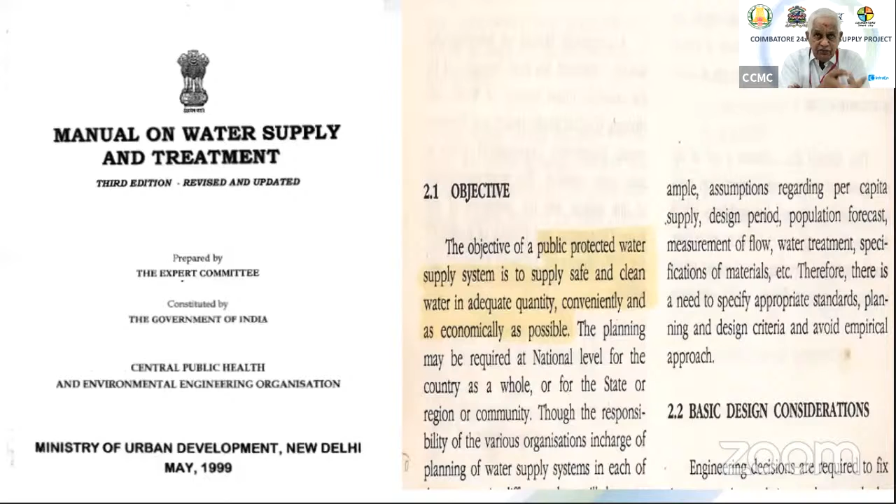Now, why 24/7 water supply? Definition of a safe water supply is, next. See, this is Manual on Water Supply and Treatment of Government of India. This is the Bible for all water authorities across the country. This defines public protected water supply system is to supply safe and clean water in adequate quantity, conveniently, and as economical as possible.

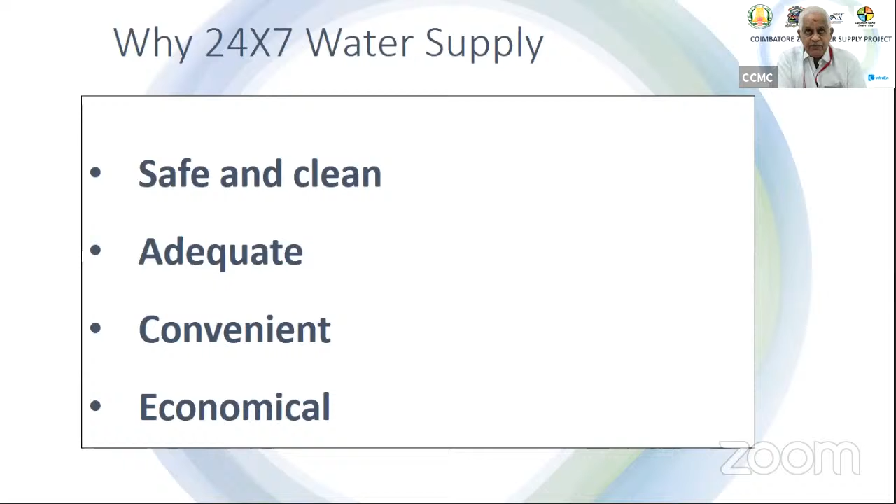Now, what are we getting? We are getting water a few hours a day, maybe on alternate days, or even in some cases once in a week. Can we say it satisfies the Government of India CPHEEO guidelines? Next. Now, the pipe is full only for a few hours in a day or in a week. We cannot have a system without any leak. So the leak water re-enters the pipe during non-supply hours along with external pollutant.

So we cannot claim it to be safe, even though we spend crores of rupees in constructing big water treatment plants and lakhs of rupees in treating it, ensuring that minimum residual chlorine 0.2 parts per million is available in the water when it reaches the distribution system. Still, because of the external pollutant re-entering the pipe during non-supply hours, water cannot be claimed to be safe. For the same reason, it is not clean as well. Next.

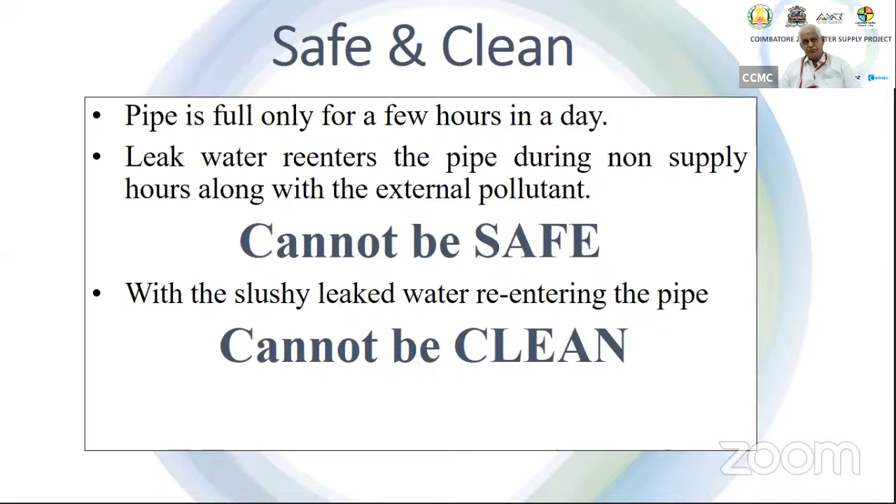Okay, now what is convenience in water supply? Convenience in water supply is availability of water when the consumer needs it. When he feels like having water, water should be available on the tap. But what's happening now? We are supplying water at the convenience of the authority, not of the consumer.

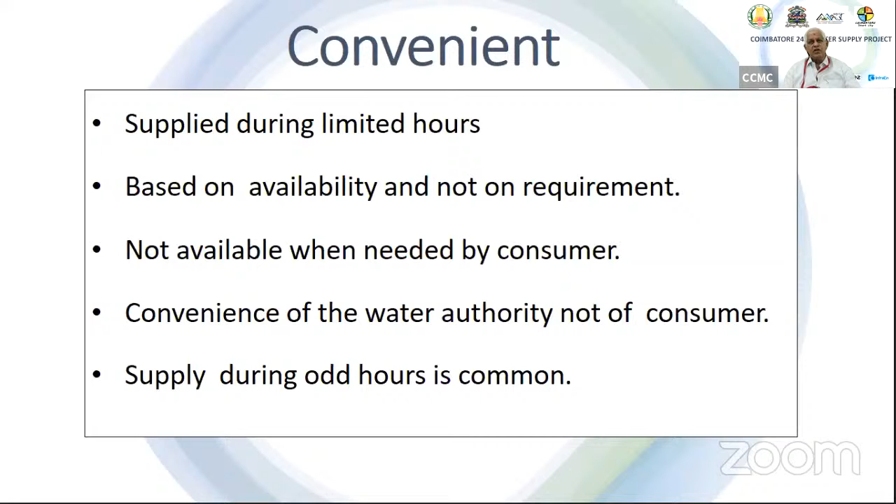It is common to supply water in the odd hours, say midnight 1 to 4, or during day, afternoon 1 to 5, or something like that. And also water is supplied only few hours, in some cases even once in a week. There are areas which get water once in 15 days as well, but not in Coimbatore. Next.

Adequate. What is adequate? Adequate is, it should be demand based. We should be able to supply water what the consumer needs. Government of India norm says a city with 1 million population and above, provided with underground drainage system, should have 135 liters per capita per day. But our distribution is supply based, not demand based. We say this is so much of water available, you take whatever you get.

The location of the consumer, maybe at a higher level or a lower level, proximity to the water tank, everything decides the water received by him. So we are not supplying adequate water to all our citizens. Next. Now, at least it claims as economically as possible. It did not say as safe as possible or as adequate as possible, but as economical as possible.

Now, requirement of a day or a week is supplied in few hours. That means our system capacity is much larger. It's 20 to 40 times more. And we need number of valves to regulate the supply to different streets. For operating the valves, we need additional manpower. So both capital cost and operating cost are higher in an intermittent system than would have been required in a continuous 24-hour supply system.

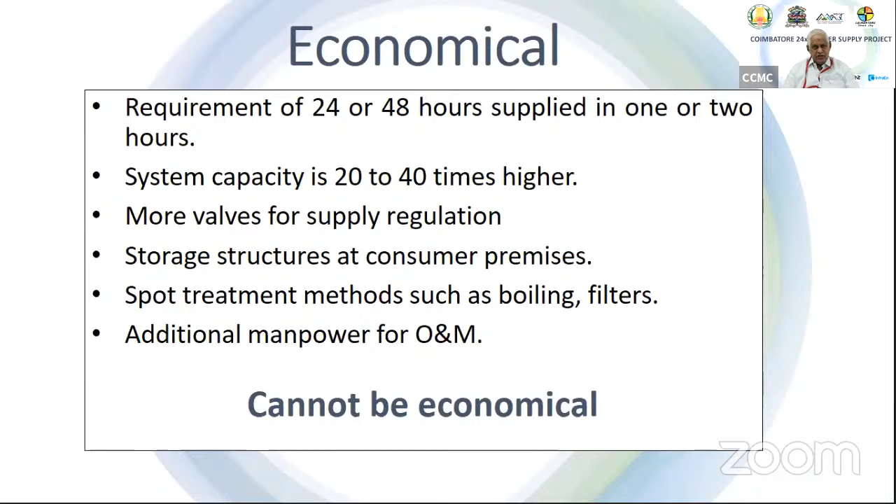So it is not safe, it is not clean, it is not convenient, it is not adequate, it is not economical as well. The intermittent water supply does not satisfy any of the criteria specified by the manual. But why is the situation like that? Just for the information, all the systems are designed only for 24-hour distribution. There is no design for intermittent system.

But unfortunately, during maintenance, due to shortage of resources, maybe manpower, maybe finance, maybe equipments, materials, etc., we are not able to maintain our system as per the design criteria. So when a leak occurs, we lose water. To minimize the loss of water, hours of supply are reduced. This vicious circle has been going on for many decades now. So even though the system is designed for 24-hour water supply, during maintenance it deteriorates to an intermittent system ranging from few hours a day to few hours a week.

One more thing, because of not adhering to the design parameters, ad hoc changes are made in the distribution infrastructure. This results in absence of as-built drawings or consumer database, which results in high unaccounted for water. By unaccounted for water, the difference between the quantity of water produced and the quantity of water billed is huge, and the local authority is not realizing adequate revenue to maintain the system. So we get trapped in a vicious circle.

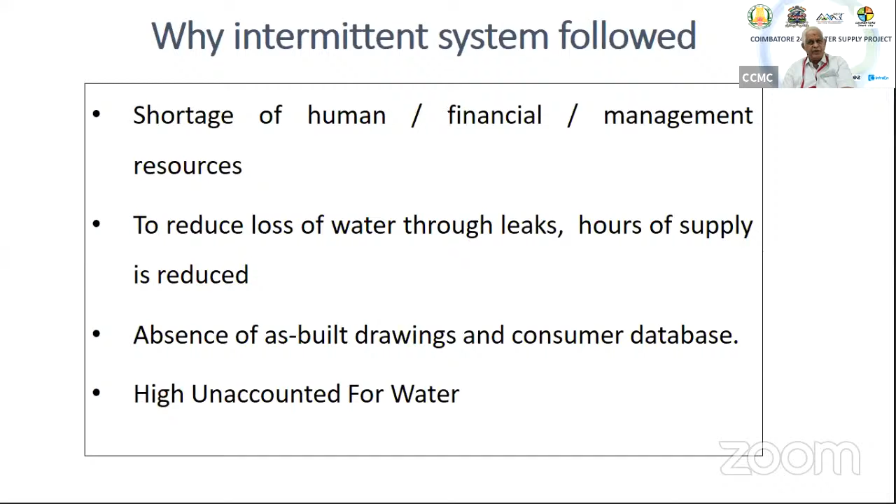Next. I don't think we can skip this.

So to overcome this, Government of India during early 2000s, that is 2005 and all, thought we have to correct this system and started introducing 24-hour water supply in selected pockets of many cities across the country. It varied from Malviya Nagar of New Delhi, Gundurao Nagar of Mysore, similarly in Mumbai, Kolkata, selected small pockets. And also the Karnataka Urban Water Supply and Sewerage Board introduced it in small towns near the western coast, Hubli, Dharwad, Davanagere, Belgaum, and all those. Everywhere it was done in selected small pockets in any given town.

Based on that experience, the government decided we can attempt it on a big city, a full city. During 2011, Pillur 2, a dedicated water supply scheme to Coimbatore, was commissioned. So Coimbatore was getting about 200 million liters of water per day, 125 million liters from Pillur 2 and 75 million liters from Siruvani, with a population of around 13 to 15 lakhs. That resulted in a supply of 150 liters per capita per day against the manual requirement of 135 LPCD. In spite of availability of adequate water, the city continued to have an intermittent system of alternate day supply or once in 4 days. To correct that, this project was taken up.

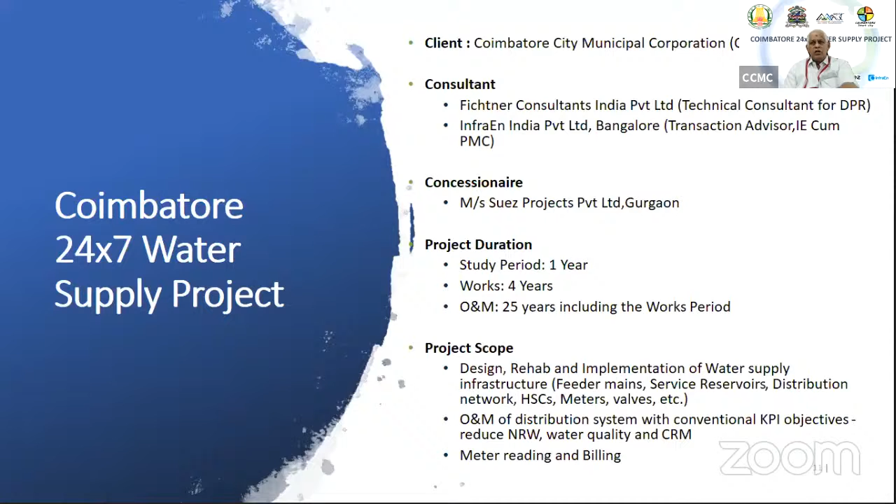Now the project duration is study period 1 year, construction period 4 years, operation and maintenance 21 years, or 4 plus 21, 25 years including the construction period. The project scope included designing and rehabilitation of the existing structures, construction of new infrastructure, feeder mains, distribution pipelines, service reservoirs, etc. And also renewing all the house service connections, providing meters, valves, and also meter reading, billing, collection, everything. The scope of the project includes everything. Now we'll go one by one.

Okay, please. The project cost is 646.71 crores for capital cost and 2,325.45 crores for O&M, making a total of 2,972.15 crores. This has been taken up under the AMRUT program of Government of India. Government of India contributes 166.99 crores. A matching grant from Government of Tamil Nadu is 101.21 crores. Then Tamil Nadu Infrastructure Development Board, because this is taken up under the public-private partnership mode, is giving a loan of 66.8 crores.

Luckily, when this project was initiated, the Coimbatore Smart City project was taken up. So the cost of infrastructure in the ABD area of the Coimbatore Smart City program was taken as the CCMC share of investment, a convergence fund. That makes 150.73 crores. So hardly 5% of the total project cost has to be incurred by the Coimbatore City Municipal Corporation; the rest comes as a grant or loan from different sources. Next.

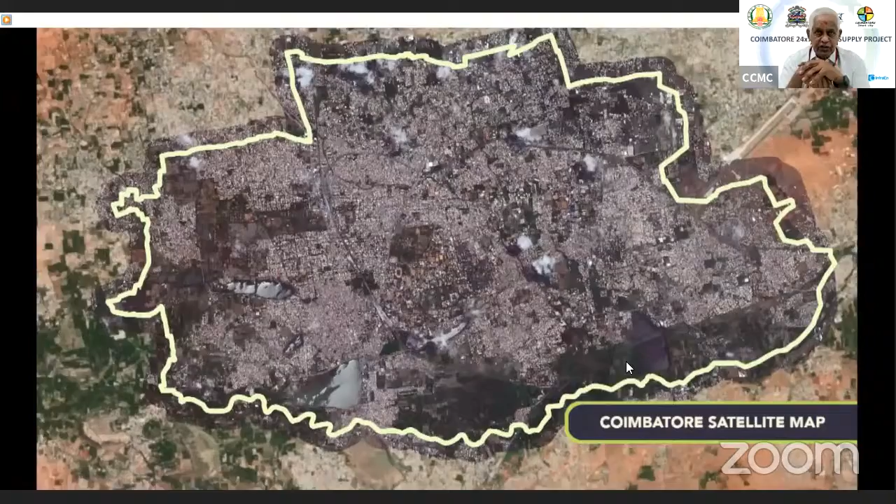To start with, we procured a satellite image of the city with an accuracy of 1 centimeter equal to 30 centimeters. All the properties within the city were identified and assigned unique ID numbers. Then ground cross verification was done with a GPS enabled tab. The surveying person can make data entry only when he is at the premises. As part of the survey, the photograph of the building and of the person providing the data were recorded and formed part of the database.

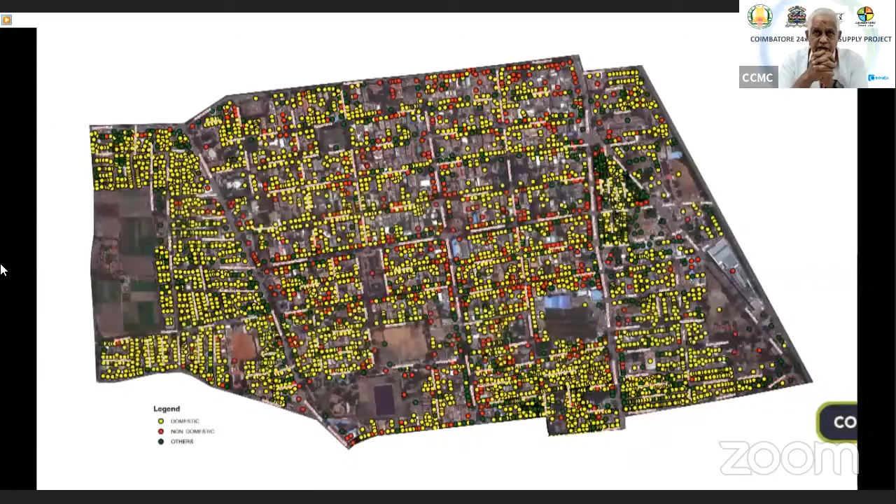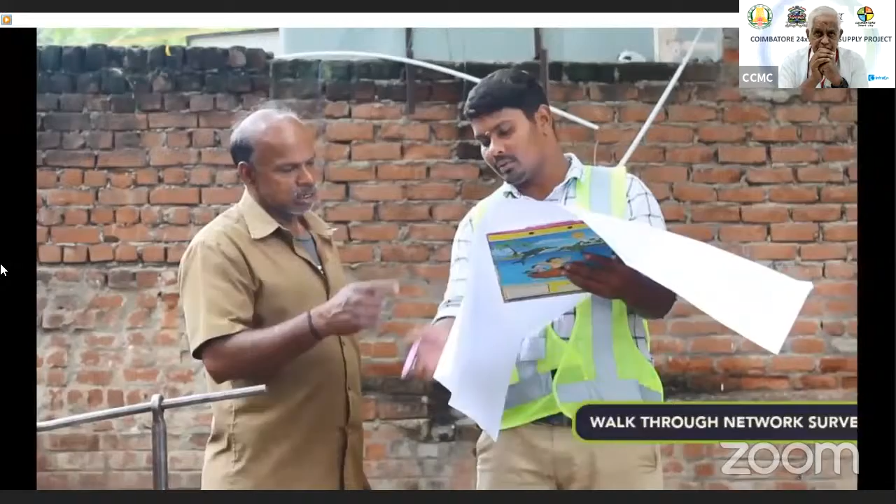The collected info and the labeled properties have been updated in the geographical information system. Again, a topographic survey was made with digital global positioning system enabled survey instruments. Existing infrastructure was assessed. A walkthrough survey for ascertaining the existing system was made. Buried pipes were identified using electronic pipe locators, marked on the ground and updated on the GIS system.

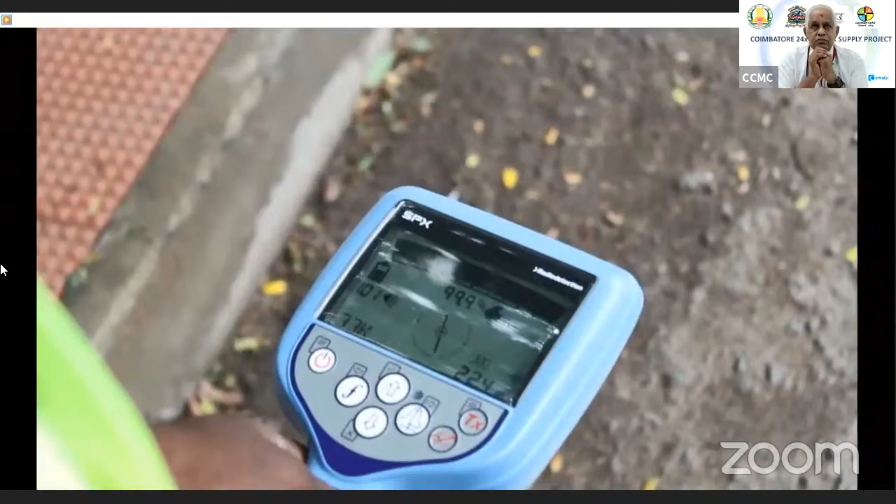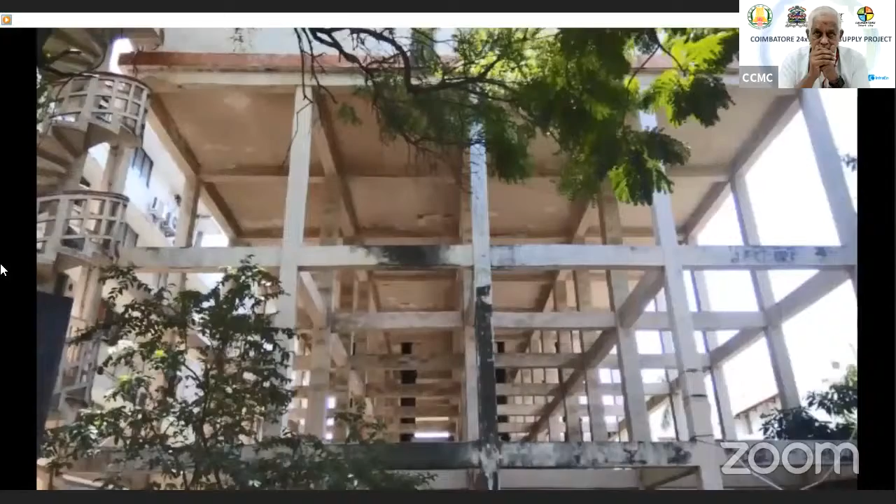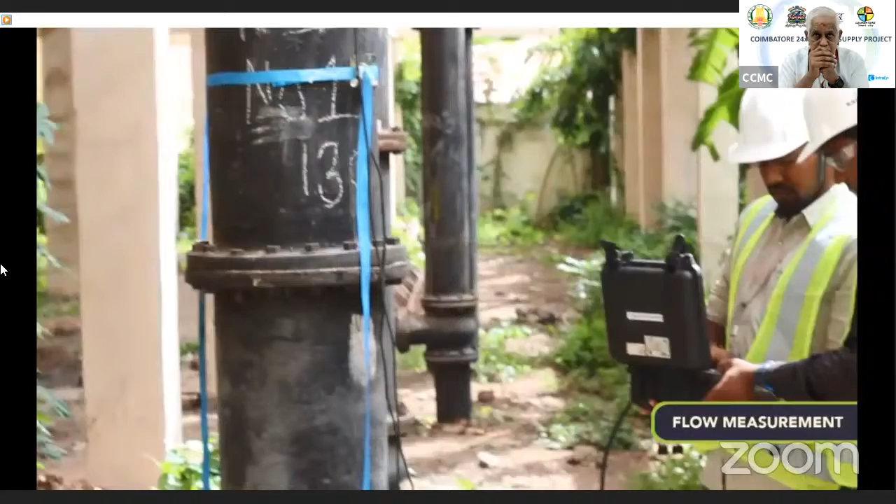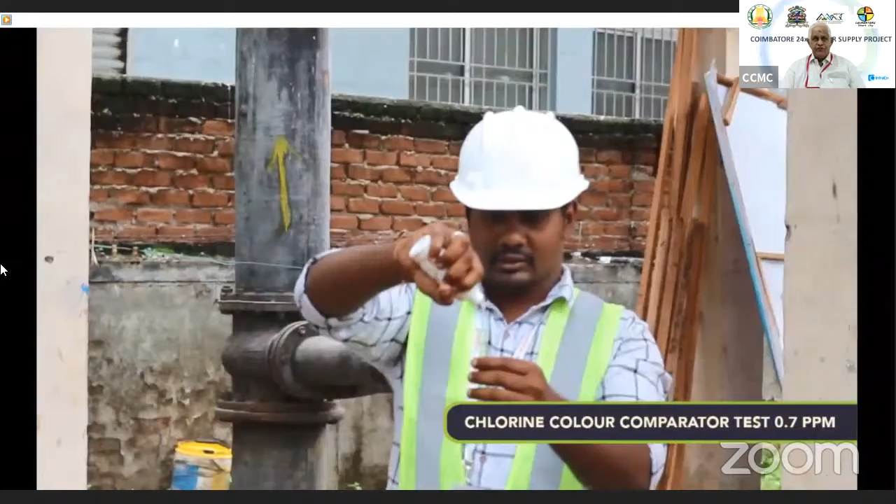So existing infrastructure is completely integrated in the GIS, including the supply pattern. Quantity of water received was measured using ultrasonic flow instruments. Information on water quality was also collected at the reservoir as well as at the consumer end. So with the database, the complete system was designed by the concessionaire.

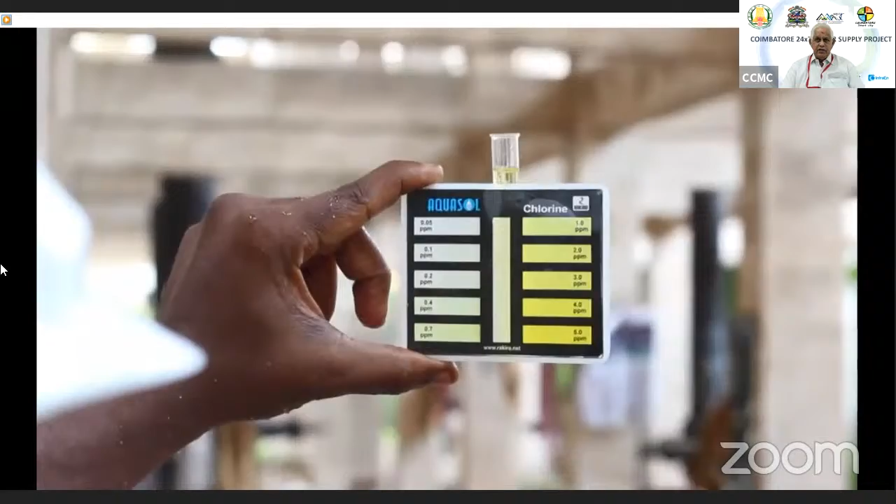Based on that, they prepared an estimate saying that we need 793 crores for capital expenditure for creating the infrastructure required for a 24/7 water supply system. But one of the big parameters was he has to quote for the capital cost, and his estimate was limited to the cap of 646.71 crores quoted by him during the bid process.

Go back to the presentation. So, key performance indicators forming part of the contract: the concessionaire has to provide continuous supply throughout the day with a minimum pressure of 7 meters at the ferrule point at the consumer end. 7 meters is approximately 20 feet. That means water can reach the first floor of the house.

And also the concessionaire has to establish customer service centers for collecting the consumer complaints. 80% of the complaints should be resolved within a specified time frame. And also, as part of the concession agreement, the concessionaire is responsible from the water supplied to him at the outlet of the master service reservoir. He has to deliver the water through pipes to the consumers.

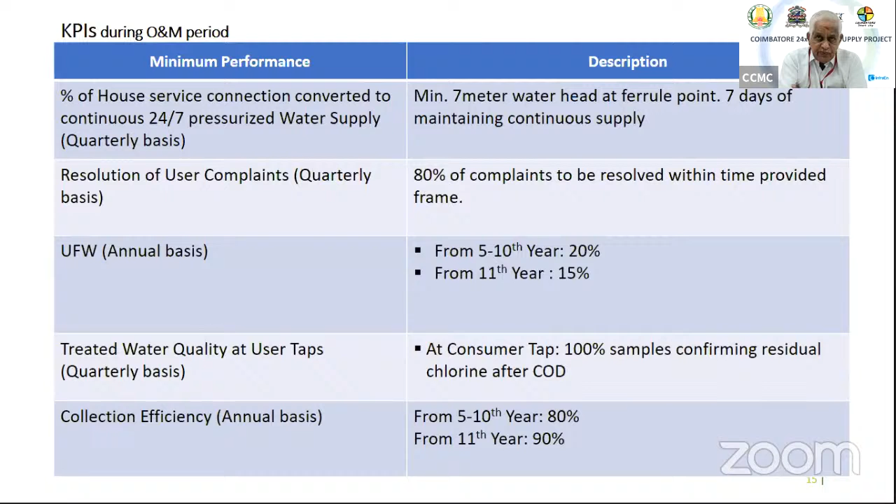Again, meter reading, billing and collection is also entrusted to the concessionaire. During the first 10 years, 80% of the billed quantity should be collected, and for the balance 15 years, he has to show 90% collection efficiency. In the contract, there are penalty and incentive clauses for achieving these key performance indicators.

Now the key aspects, many of which I have already explained. In any private arrangement, ownership of the infrastructure will be transferred to the private party. But in this case, the contract clearly specifies ownership of the project facilities lies with the authority, which is Coimbatore City Municipal Corporation. The operator is only responsible for the services and works without any ownership transfer. He has quoted a price required by him for operating. He will be paid for that by the authority.

The contractor, that is Suez, has no say on water tariff. Water tariff will be fixed by the City Municipal Corporation as per the guidelines of the Government of Tamil Nadu. The operator is only responsible for collection of the water user charges on behalf of the authority. That is, bills will be in the name of the authority only.

The concessionaire is providing services of taking water from the master service reservoir to the consumer, for which he is paid as per his quoted bid price. Based on satisfactory performance, he will be paid on a staggered annuity model. Of course, penalty and incentive clauses are there. Just for information, the entire contract documents, including the bid evaluation report, are available on our website ccmc.gov.in under the Coimbatore 24/7 water supply link.